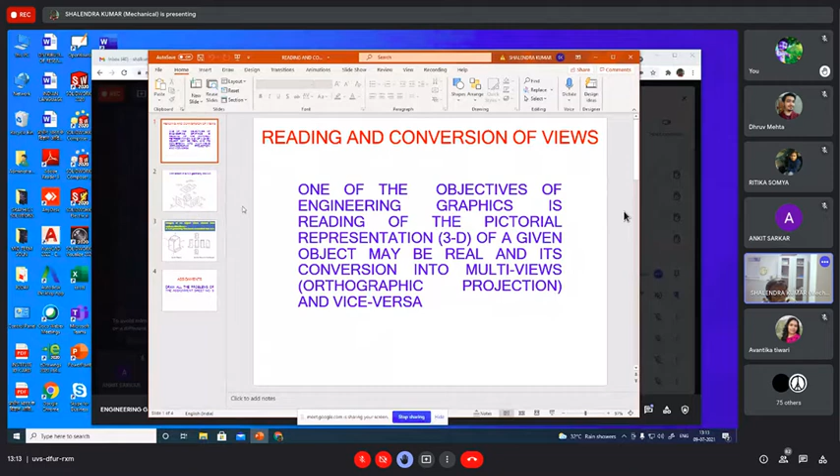For example, let's say this is an object in the middle. For simplicity, I can say it is a staircase - this is the ground floor, first stair, second stair, and so on. So this is your real geometry.

You want to convert them, or get its top view, front view, side view. Or another situation is, these three figures are there, and with the help of these three figures, you have to do this one.

So if this figure is with me, if I want to draw its top view, this will be the top view, because this line will coincide with this one - I will simply see two rectangles. Same thing in the front view, I will see this face and this face. In the top view I have seen this face and this face, in the front view this face and this face is visible, and in the side view this L structure is visible.

So your objective is either to draw this with the help of these three figures, or have the concept in your mind of what will be your final product. Or in this case, if you want certain modification - this object was available with you and you want to modify it - accordingly you will convert the top view, front view, side view, and the interior detail you want to add can be incorporated here.

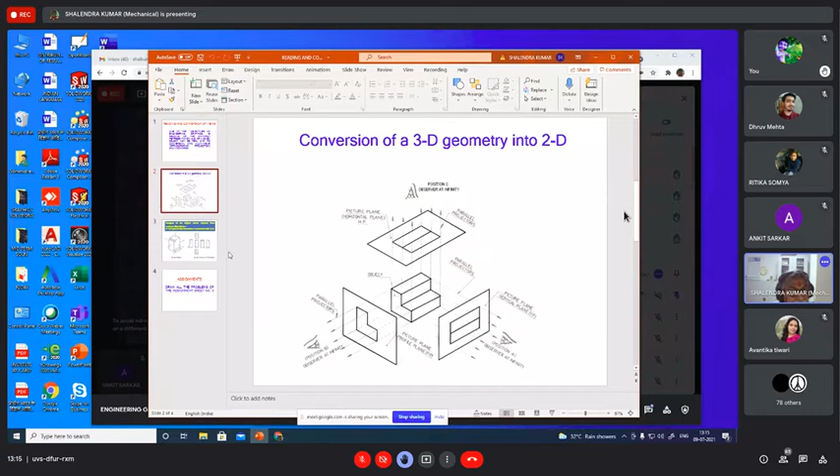Let's say if I see another figure, this is the figure, one object is there. If I draw its top view and front view and so on, all sides one can see, and when you are able to see from different directions, the same object has a different image.

I have drawn all these figures to know why it is necessary to select such a view - when I am going to draw the front view, which side should be my front view. Your objective is to have maximum details of the object in a given drawing, whether it is top view, front view or side view. Whatever you are drawing, your objective is to have maximum representation of the object in that particular view.

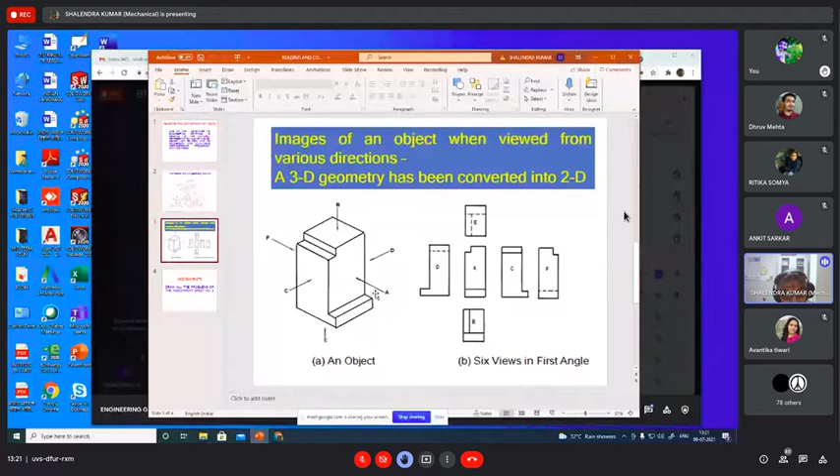When I join E, A, B, what will be the object, with the combination of B, E, and A? A is this side, this is your front view, A. B is your top view, and E... no, E cannot be, then C, I have to take C and F as the side view.

So this is our objective. Either this is available to me and I have to get this one, or these are available to me from this one, and I have to get back to this one. This is the objective of our engineering drawing.

So for this also, I have given you some sheet. We will discuss some of the figures here right now, and then we will see. Okay, I'm coming to the next slide.

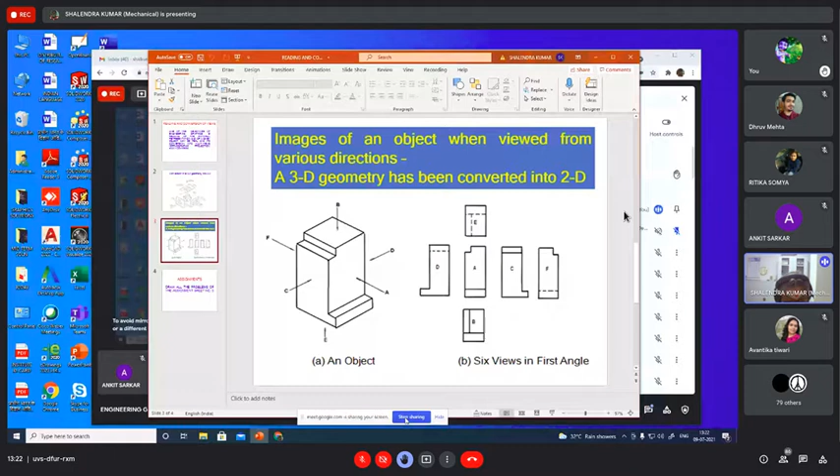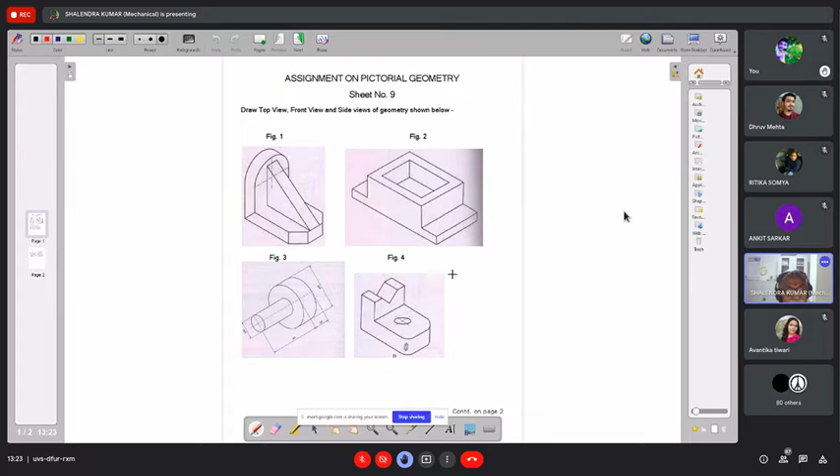These are some 3D objects, and these objects are to be converted into 2D objects, or orthographic projections of these objects are required to be made. So now, just for a few minutes, this picture is with you. All of you, please show me the top view, front view, and side view of this object, and then I will draw the picture. Please, on your rough book, show me the top view, front view, and side view of this object.

I am not interested in getting the exact shape, but all of you try. I have already sent this problem sheet.

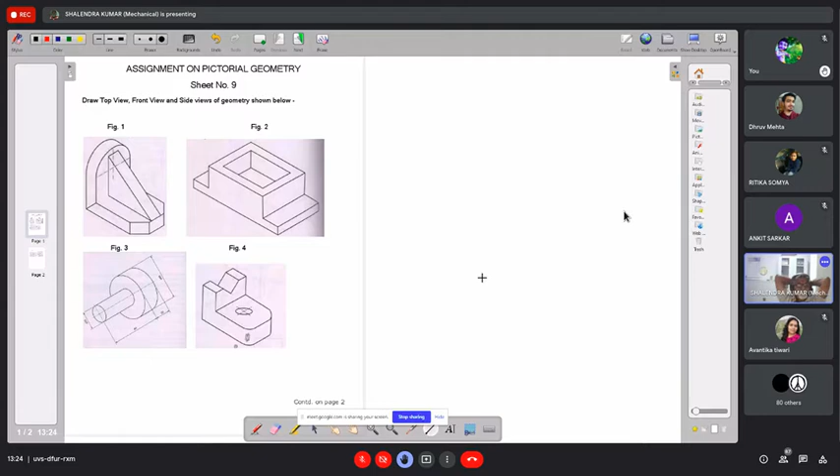Sir, since everyone today has computers and touchscreen mobiles available, why don't we make 3D models the industrial standard instead of still using 2D?

Okay, so you want to have that, okay, I do, but I will do that in the next class. First, for the sake of practice, you have these geometries. This is 3D geometry, yeah, all this is 3D.

One sir, I'm saying that at the industrial level, why do we need to even share 2D drawings when we can just pass on the 3D drawings and someone can view it on their computers? No, no, 2D drawing is essential.

How is this? This information, this one, it is not giving you the complete information. Here, just, okay fine, this is the red, let's say on this side one hole is there. Are you able to see?

But in the picture, not 3D, we can change the model view, the camera, it is a 3D view, it is a pictorial view. Sir, I'm saying 3D model. Let me see, with one orientation, it is not possible to define the object completely, whatever the type of 3D model you have.

With the given object, for simplicity, if the given object is symmetric, then it is fine, in any position the image will convey it. But if the object is not symmetric, with certain ribs and cuts on each and every surface or face, then your pictorial view, one 3D view, is not sufficient. You are required to have 4 or 5 views in the 3D view.

Sir, first one done.

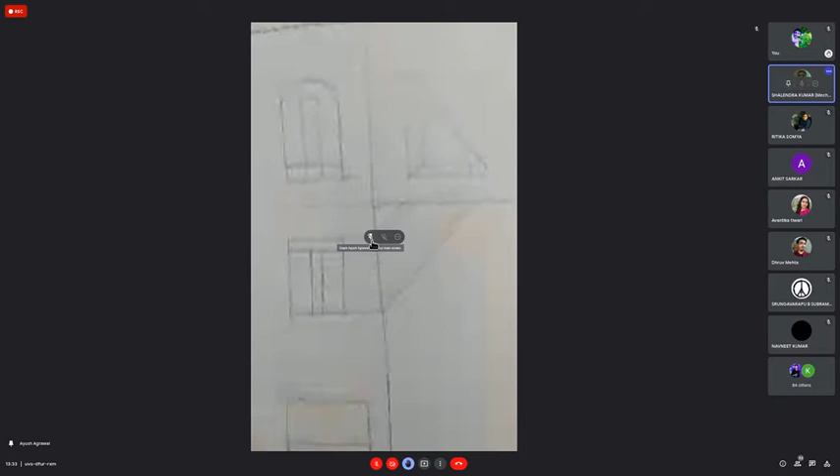Okay. So why no? This figure is not... perhaps it is not correct. This one.

This is your side view. This is your front view. Yes sir, this is your front view. So top view and front view will just... this will be the side view. So this is your front view. So top view will be just below, na? This is top view, and side view cannot be just one above the other, na?

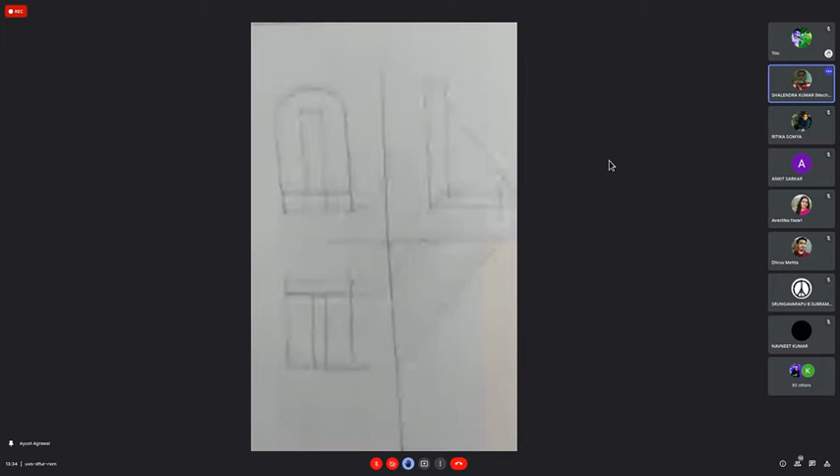Sir, in this problem, front view is this, and bottom is top view. So this is the side view. Yes sir, this is side view. Front view, this is the front or side. Front view, right, this one is your front view. Oh, this is your front view.

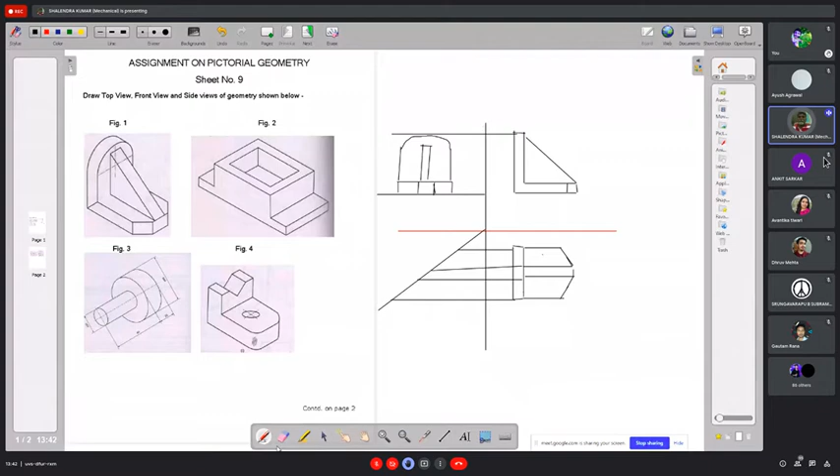I have not measured the dimension, but as far as the look is concerned, this will be all three views of the given object. This is fine. Already two students, both of you have shown the correct answer. Now let's go see another question.

Okay, you tell me what will happen in this case, I mean in figure 3. Just imagine, tell me what will be the front view of figure 3.

So T shape. Front view of the T shape, okay. So rectangle or circle? Rectangular, rectangle.

Is it something like this or something else? You want to tell this one or something else? Yeah, tell me. Sir, T is there. Can't it be a circle? So yes, so this one. Is it right?

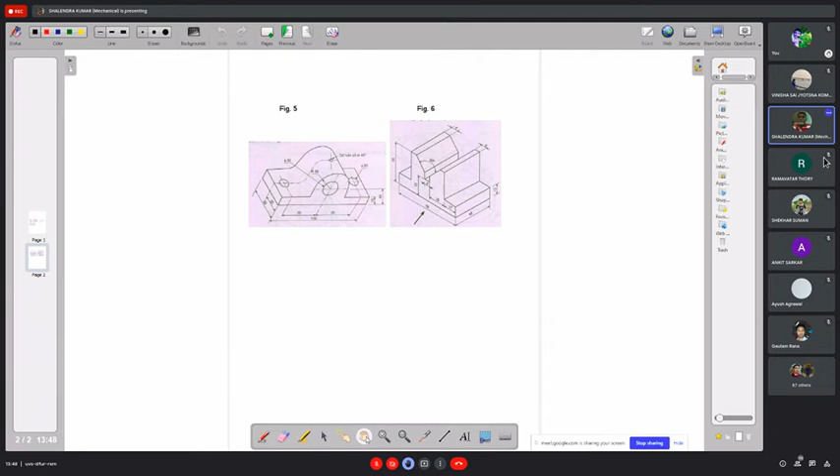Yes sir, then next figure is there. Now you tell me what will be its top view and front view.

The front view is here. If it is not given, as I said, in this case direction is given, so this will be the front view. If it is not given, the first characteristic is it has to be from the right side, so you have to see from here.

One second characteristic is maximum details should be visible. In this figure, maximum detail is visible from this side itself, because when I will see from this side, this one is not visible - only these portions are visible. So only one half of this one is visible, whereas in the front view, maximum portion of this one is visible. So this will be the front view.

So what will be the front view here? This rectangle and this circle. In front view, you will see this one, this one, this one, this one, this one, and this circle. This circle will not be visible here, so this dotted line will be here and here.

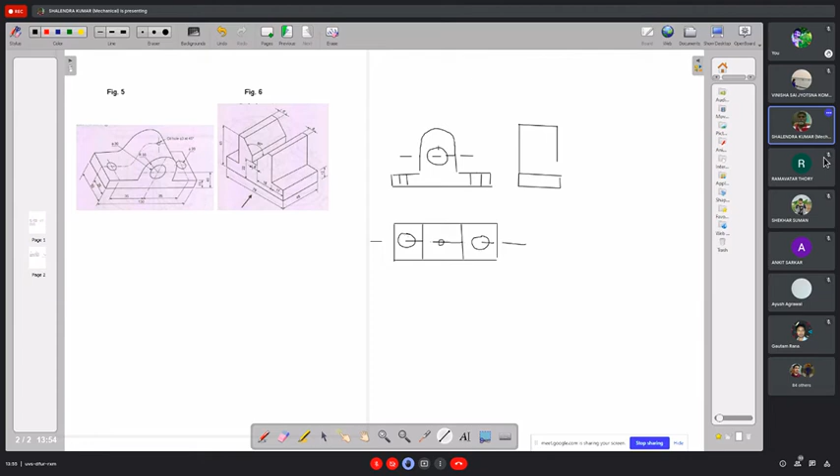Now in the side view, the center line will be visible. If you wish, you can draw the center line. From here also, we use axis, you can represent the axis.

So why is the front view this one? Let's say, someone has asked why I have assumed this is my front view. Now compare these two figures. The information available in this one is more than this one. So this is the front view and this is the side view. This is the solution of figure number 5.

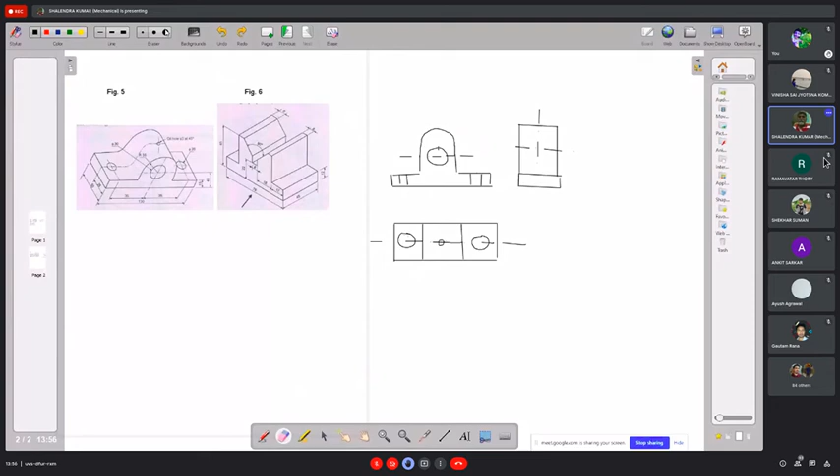If I draw figure number 6, in figure number 6, already the direction of the front view is given. So in the front view, what will you see? In the front view, you will see this edge, and this V section.

This one, this one, this one, this one, and then this V section, starting from here, this line, this straight line, then this curved line, then the slit of the key, here the key will be there, this is there, and this inclined line, this one, and this one. So in the front view, we'll see these cases.

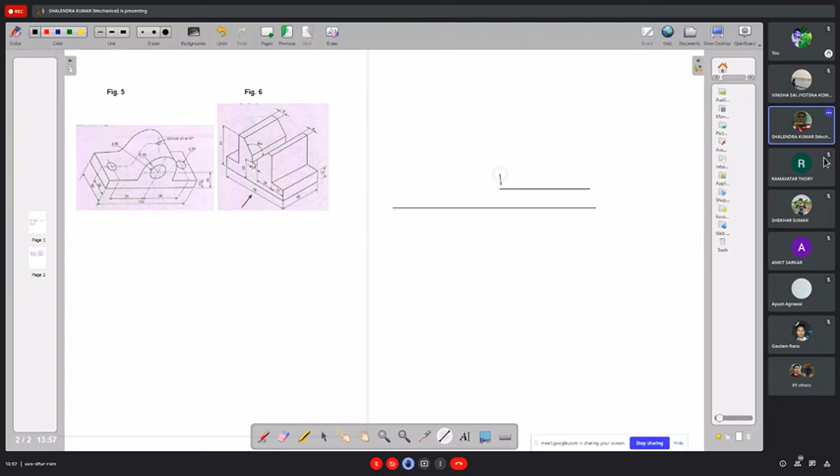So in the front view, if I draw it, this is your XY. Front view will be: you start with a straight line, complete a straight line here, and then this line, then this line from here up to here, and then this line, little bit straight here, and then this curve will be here, curve is there, and then a straight line for the key.

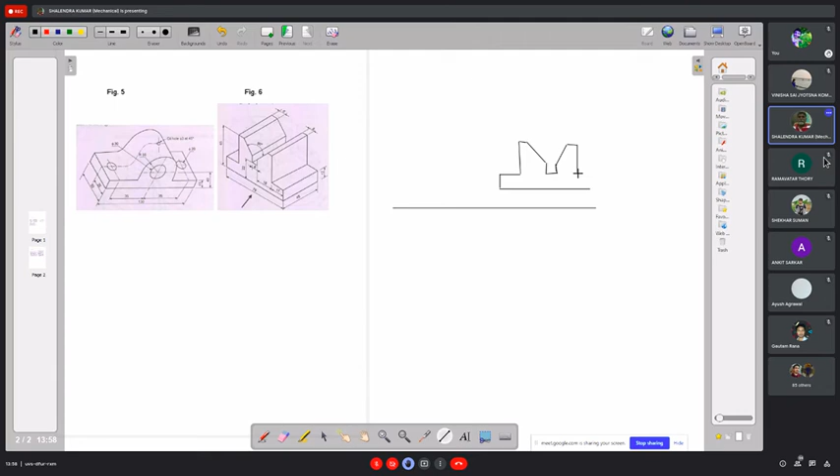This is a straight line up to here, and again now this curvature will be there, identical up to here, and then a straight line, it will come down up to here, it is like this, and from here it has to be joined. This is the front view.

If I draw the top view, what will happen? In the top view, I will see this: 1, 2, 3, 4, 5, 6 rectangles will be visible. So you copy this one from here itself. Your one dimension is this one, and this is the outer one.

And now you go on drawing all those rectangles. So in the top view, this first rectangle, second, and in place of this one is this one. So this is a flank from here, this is flank. And then the second rectangle is this one, whatever straight figure is there from here to here.

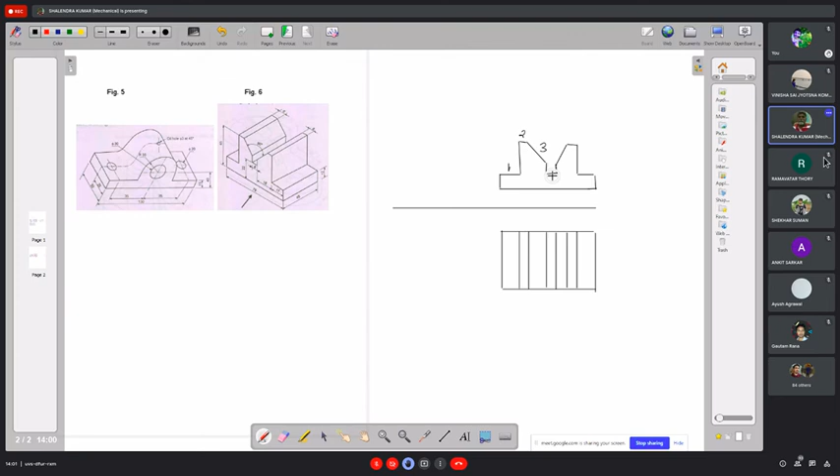So if I try to write which rectangle is representing, this is first, this is second, and from here to here it is third. This is fourth, this is fifth, this is sixth, and this is seven. Similarly, you can name 1, 2, 3, 4, 5, 6, and 7.

These 7 rectangles are visible to you. When you draw its side view, you start from here, one rectangle, then this rectangle, and now tell me which one will be here. You will see a portion of this one will be visible, it's fine. So here now you will draw this one from here to here, one dimension, just as usual.

You draw this one, and now first you take this one, then this one. See here, this part of this one will be, and you just see the top view, join the top view.

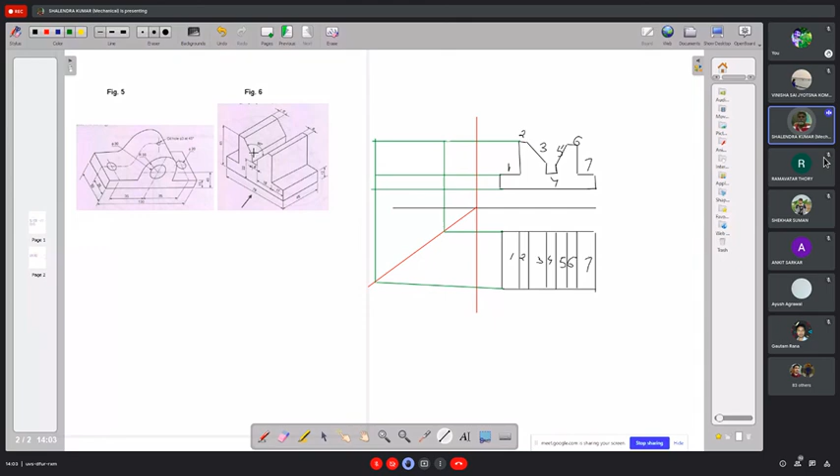So here one line is this one, and let me remove this one. Now here, so one portion, one edge along this will also have to be drawn. When I see the side, due to this inclination, this will also be represented. So here, this is also black. Let me choose this one and this one. So the final figure here is...

Sir, if the object is symmetrical, we can draw the side view either to the left or to the right.

Yeah, correct, yes, you do that, definitely. When the object is symmetrical, you can do that, you have that freedom. And when it is not symmetrical, we need to draw two side views.

Definitely, okay. So this is your answer for the figure number 6.

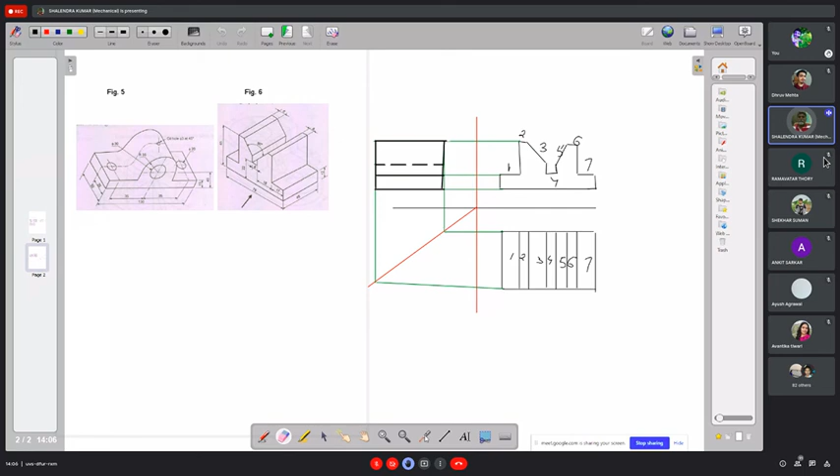So 6 figures are there. Here, just we have seen, we have drawn 1, 2, 3. This figure we have drawn, this figure we have drawn, and then we have drawn this one. So 4 out of 6, we have drawn. You are required to draw all 6 figures. This one and this one we have not touched today, but you will do that also.